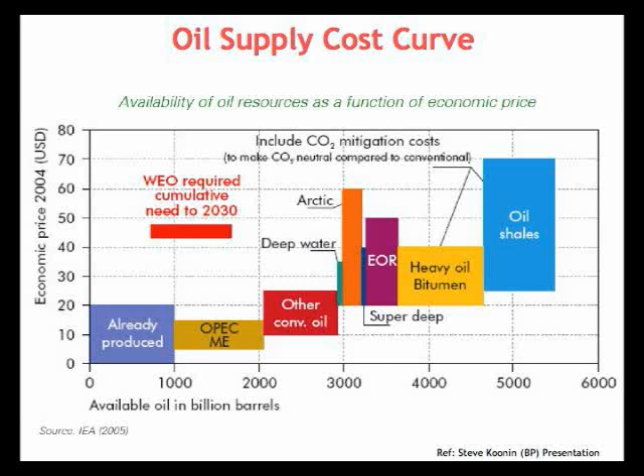All right, so here is what we've already produced in terms of billions of barrels of oil, so it's 1 trillion barrels that we already produced. This is what is available, but if your price is at $20 a barrel, well, you're sort of limited to this, but if your price goes up out here, then all of this is really available. So the availability of oil is a shifting target.

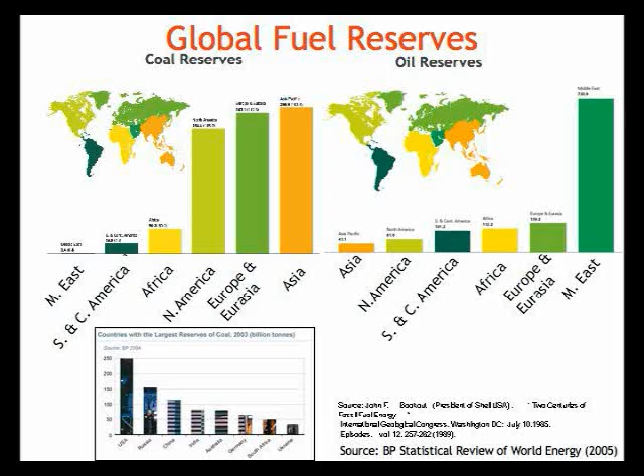But if you look at where the economies are growing, this is the oil reserves, in terms of just security of the oil reserves. You know where the oil is, the Middle East, and some in Eurasia. But this is coal. And this is Asia, Eurasia, Europe, North America. And here are the 4 biggest reserves of coal in the world, which is the United States, Russia, China, and India. And we know where the economies are growing.

So if push comes to shove, if something happens out here, political instability, or just turning off the spigot, we'll be turning to coal. And that, of course, has its own consequences. But any fossil fuel can essentially be turned into any other fossil fuel. The idea of turning coal to a liquid fuel has been around since World War II, the Fischer-Tropsch process.

So in terms of the availability of fossil fuel, we have at least 150 years of coal, at least in the United States, maybe 200 years. There's debate. And so as far as the 3 big economies of the future, United States, China, and India, coal is certainly there. So if you're thinking about the next 50 years, the availability of fossil fuel is certainly not the issue, because there's enough. The price is an issue, and that's a question of supply, demand, et cetera.

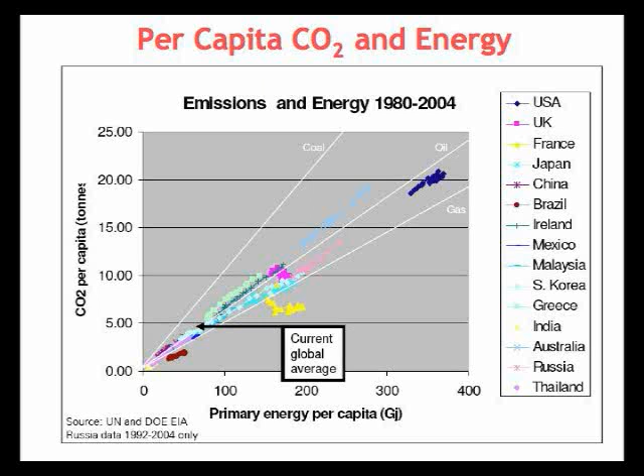But if you turn to coal, this is the CO2 per capita, and we all know that the carbon intensity of coal is almost double that of gasoline or liquid fuel and natural gas. So that has CO2 implications. But perhaps the best way to look at this is the following. I like this paper by Hoffert, and there are many authors on it, which came out about 10 years ago, where it looks at the projection for the next 100 years.

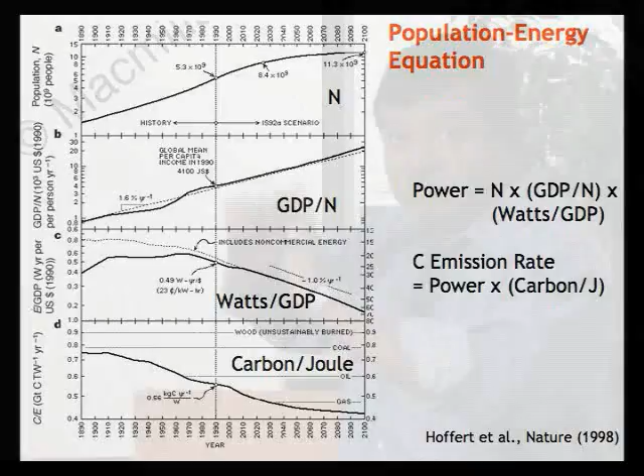So this is world population, and today we have about 6.5 billion people, and it's a nonlinear, log curve out here, and that is expected to saturate at around 11.5, 12 billion people. And I'll show you why that is saturating. Then this is GDP per capita, how much you produce per person, and that is increasing, which is a good sign. That means you're producing more. The amount of energy, this is global, not just any country.

So the amount of energy or power that you need to produce a GDP is going down, which is also a good sign. And finally, the carbon per joule, the carbon intensity, is going down, which is also a good sign. So all these three are good signs, except for one, that is population. And if you take the product of the first three, you'll get the total power. If you take the product of all four, you get the total carbon emission rate.

And this is what it looks like. So this is the power that the world needs. Forget about the colors out here. They have implications, but let's just look at the total. Today, it's about 15 terawatts of power that the whole world needs. And we are emitting at about 7 to 8 gigatons of carbon per year, and that is increasing linearly. This linear increase is very important.

Why is it increasing linearly? It's because the demand of energy is increasing, and the carbon-free or carbon-neutral cannot keep up. So that gap between what is required in terms of power and what can be supplied from carbon-free just doesn't match up. If they're growing at the same rate, you would have a constant carbon emission rate. But the gap is increasing, and this is essentially that gap.

So what happens to this carbon? Well, we emit CO2, and the biggest sink of CO2 that goes out in the atmosphere are the oceans. And so I won't do any climate modeling out here, but do a very simple limiting case. And a limiting case is probably the best way to do it, or at least the simplest way to do it. Let us assume, for the time being, that every molecule of CO2 that we emit can instantly come to an equilibrium with the ocean. That is, you can dissolve it in the ocean immediately.

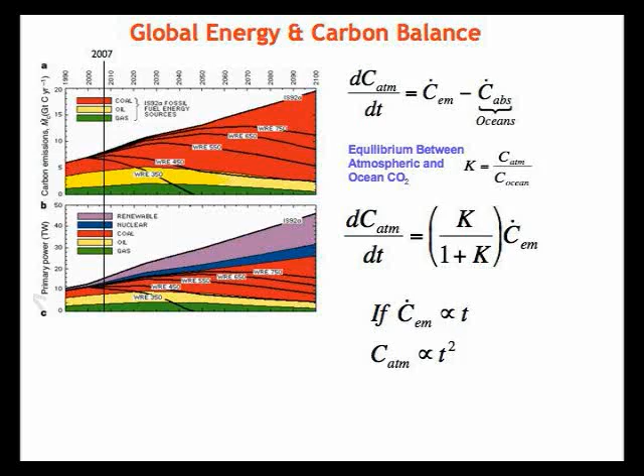That's obviously not true. It has a lifetime of about a few hundred years or so. But let us take the best case and see how bad it is, right? Let us say the concentration immediately comes to equilibrium. Forget about diffusion. Let's assume that. What will happen? Well, here is the mass balance. The rate of change of carbon in the atmosphere is equal to emission rate minus absorption rate. This is like bookkeeping in your bank account, right? Your income versus spending, and that's how much is there in the bank.

But let us say that it comes to an equilibrium. So there is an equilibrium constant. Henry's law gives you an equilibrium constant of the carbon in the atmosphere and the carbon in the ocean, and you could write it under equilibrium. This is the best case scenario. And then you can rewrite this equation in this form. And if that's the case, you have the emission rate and some constant, all right? And that's the rate of change of carbon in the atmosphere.

If this goes up linearly, this is 10 years ago. This is now a little nonlinear. But if this goes up linearly, you get a quadratic change in the carbon in the atmosphere. So essentially, we're just throwing it up there and it's accumulating. So this is what you get then. You get a quadratic, and if today we are at 380 parts per million, you can do a little curve fitting and you can project. That's the best case scenario. That means in 50 years, we double the pre-industrial level. So as we all know, there are many things that are irreversible at that point.

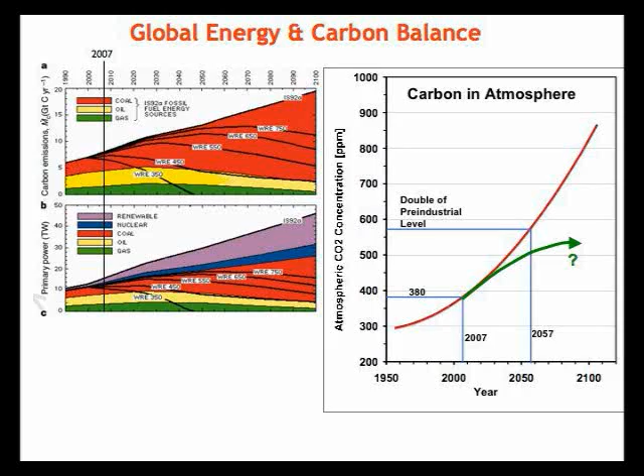And this is the best case, and if you have sort of positive feedback, the permafrost melts and it throws out methane, you might be at some t raised to n, where n is greater than 2. So that's the issue that we have. And the question is, how do we turn this around? That's the big question that our whole generation and the next few generations will have to face, right? So what do we do?

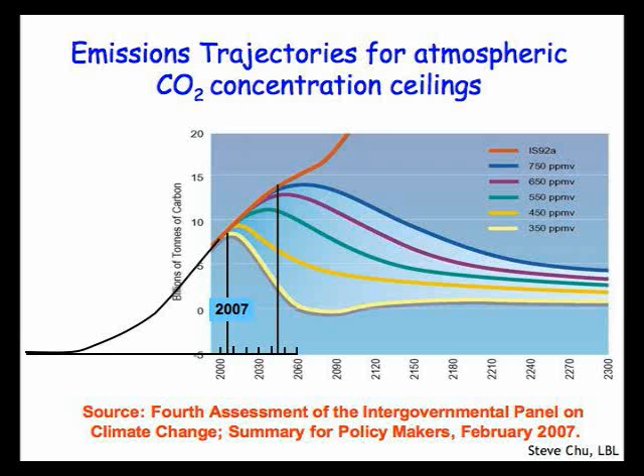Well, here is the IPCC prediction or model, and this is an optimistic one: if you were to stabilize at 550 parts per million in the atmosphere, and today we are at 380 parts per million, that is the emission profile that you want. That means that this is a constant. Eventually, you want to reach a constant emission rate, which means the gap between the demand and the supply has to remain constant, all right?

The carbon-free supply and the demand increase, they have to go parallel. Otherwise, you can never stabilize this. Otherwise, that'll increase. This is essentially that gap. So how do we get there? And that, of course, is, there's a lot of, today we are out here, there's some inertia in the whole economy. There's economic implications of this.

And how do we turn it? This technology policy is a combination of that. And it has to be addressed both from the supply side and the demand side. It's like a stick. You want to shorten the stick. Well, if you only shorten one end, the other end might grow. You've got to attack it from both ends and see how you can reduce the demand and increase the carbon-free or carbon-neutral part of it, because if the carbon part of it grows, then you lost this battle. So both attacks have to happen simultaneously.

Now there are questions, which one should we focus more? Should we do the demand side or the supply side? Well, and there are lots of economic models of it. I mean, really at the end of the day, we have to do both. Some of them will come on board in terms of actual implications at different timelines, but if you don't do both, we'll basically miss the boat because that stick might actually keep growing because we haven't addressed one side. All right? So this is a two-headed snake.

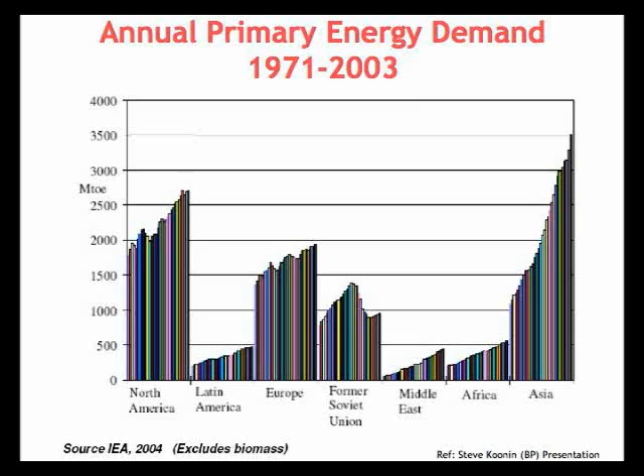So this is now, okay, so why does the demand increase? Well, this is the demand, annual primary energy demand, going in different parts of the world, North America, Latin America, Europe. This is, where are we? Out here. That's the demand out here. But look at this demand going up. Okay, this is Asia. So we have to keep this in mind that this is a global issue. You know, there's only one atmosphere.

It's a global issue. And so if this demand goes up, we should be looking at that very, very carefully to see. And this, I believe, is an opportunity for the United States, especially for the commercial side, to provide technology and policy help for this part of the world to see how this could be turned down without changing a lifestyle. And that's the important part. How do we do that?

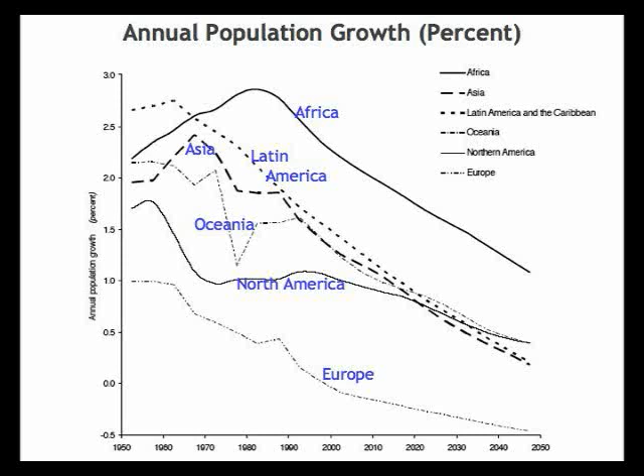So this is population, there's a lot of data on this from the United Nations, et cetera. This is population growth rate. You can see this is Asia. It's actually going down, and it's expected to go down. This is North America. Europe is actually negative. There's negative population growth. The only reason the population of Europe actually goes up is because of immigration. It's not because actually Europeans are reproducing more.

But Africa is over here, and that is also going down. But this is based on fertility rates and implications of lifespan, et cetera. All put together, that's the population growth that you have. But there are some factoids that I think are very important to understand. Or just, you know, it's stunning what the numbers are.

47% of the population growth from now till 2050, all right? So population will grow 47%. The increase in the next 50 years will be more than twice the population of China today, all right? The less developed countries will grow 58%, developed countries will grow 2%. And the less developed countries will account for 99% of the increment in the world population. And population, as we know, is related to the energy use as well.

And that depends on the income level and the GDP level. But certainly, there are two factors going on out here. And I'll come to the second factor. First is the population is going up in the developing countries. And second, the economies are improving in many cases. If the GDP, the income level goes up, the energy use goes up. So we have a double whammy that is happening in the developing countries.

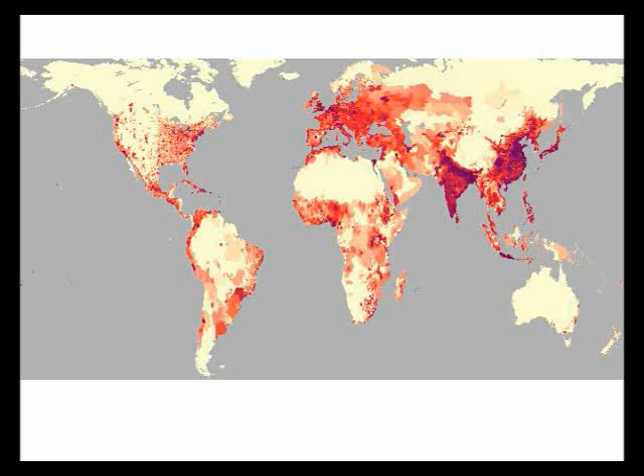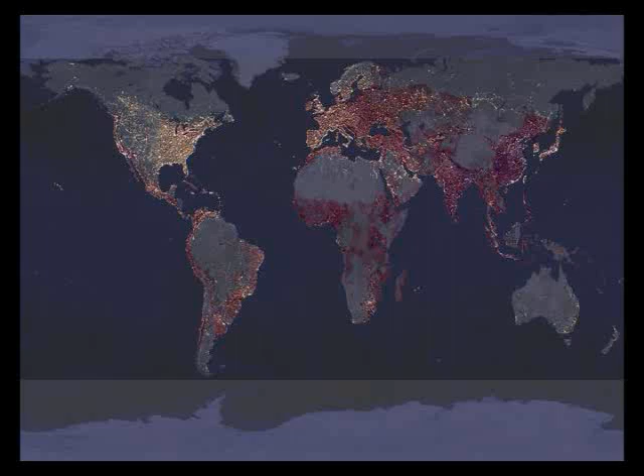So we have to address this issue while addressing this issue as well. And believe me, they are really eager to look at technology and policy help in how to move forward. So that's the real global issue that we're really facing. And as I said, you have to look at it from both the supply side and the demand side. You cannot ignore one, all right?

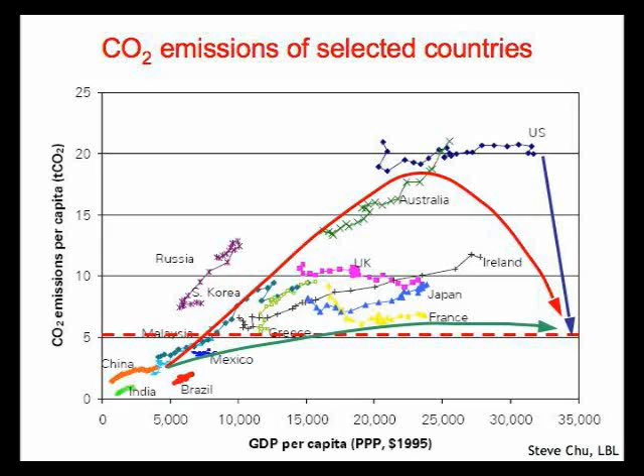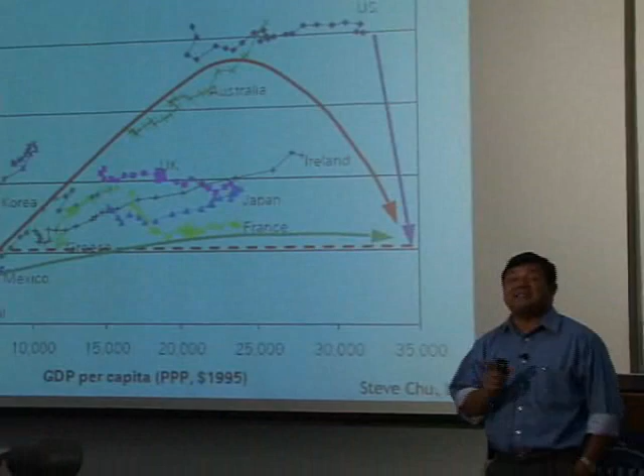And this is now the CO2 part of it. Some of the countries don't quite fall on the line because France is mostly nuclear, and they flatten out here. The question that we have to ask is, of course, how do we get the United States down to that level? But in addition to that, do we want China to go that way or to go that way? And this is a chart I stole from Steve, so full acknowledgement. But that's really, which path do they take? And can we help them go on the right path?

And I think this is one of the biggest opportunities for the green industry in the United States, to provide China and India with how to take the right path. Because we are in many ways ahead of the game in terms of technology and the policy side, especially in California. Okay, so as I said, we have to look at it from the supply and demand.

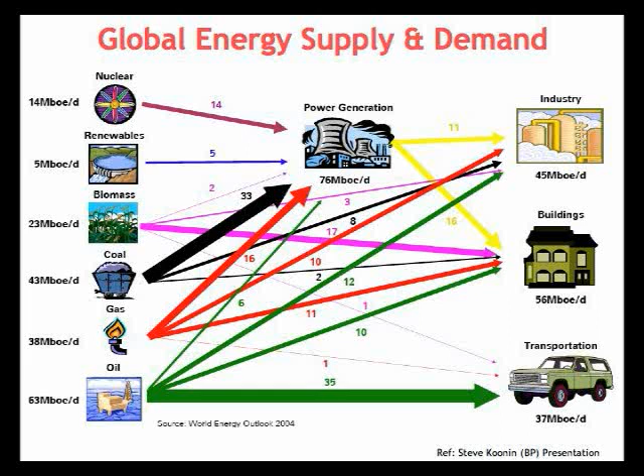This is the supply side, nuclear, renewables, and you can see the numbers as to where globally the primary energy is provided. This is millions of barrels of oil equivalent. Don't ask me to convert it to exajoules or whatever. But let's just take that as relative numbers, 63, 38, coal is 43, et cetera. And this is where it goes. Industry, buildings, and transportation, roughly about 1/3, 1/3, 1/3, all right?

So if you want to address this issue, clearly the carbon-free or carbon-neutral side of it has to increase. And if you look at the magnitudes, it's clear that there's a huge opportunity out here. This is where Helios, EBI, JBEI, CERC, and all come in, looking at this side of it, right? And now we have to look at this side as well. How do you reduce the demand out here? And this way, energy efficiency. And this lab, of course, our division, has a long history in looking at this side and the interaction between the supply and demand, which is the grid and the utilities, et cetera.

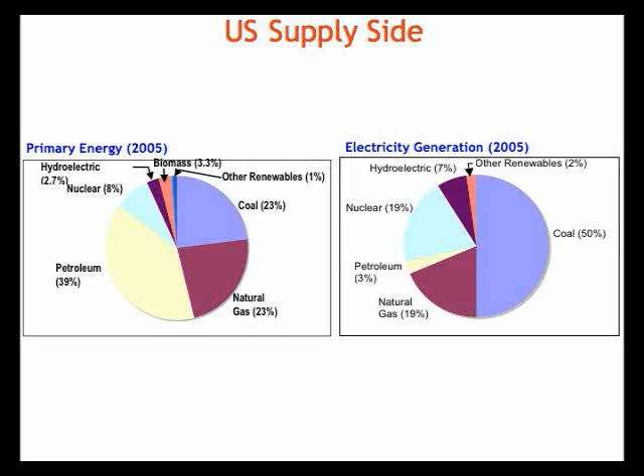This is the United States supply. We have the primary energy, petroleum is 39%. Most of it goes into transportation. Here is natural gas. Coal is 23% of primary energy. Renewables is 1% today. Biomass is 3.3%. Most of the renewables is hydroelectric. It's 2.7%. Nuclear is about 8% or so. If you look at electricity generation, so we're ignoring transportation now, 50% is still from coal. And natural gas is about 19%, nuclear is about 20% or so. So that's where we are today.

And so if you want to change the supply side, we have to look at this part and how do we increase the magnitude. There's technology, policies, all kinds of things have to happen. Wind and solar photovoltaic, solar thermal, all have to happen sort of simultaneously. And advanced biofuels, I would say, has to happen out here. The United States has changed its fuel, and it takes about 50 years or so to change the primary use of fuel. So it's not that this has never happened before, but for change of fuel from the supply side, it'll take about 30 to 40 or 50 years or so, right? So that's the time frame that we're looking at.

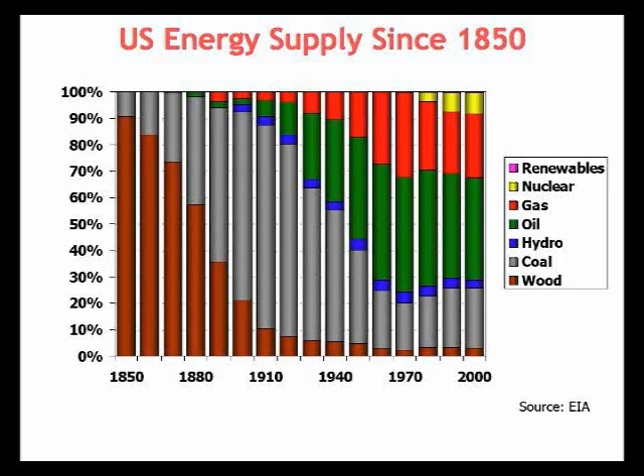But what I want to focus on is the demand side, because that's where our division, ETD, is focusing, and the interaction between the supply and demand. Because as I said, we have to address that side in almost an equal way as the supply side. And this is some history, and there's a long history of what happened in the 1970s. In many ways, we are reliving the 1970s. And I'll tell you at the end that there are a few cases where we can say that this is different. And I'll give an example.

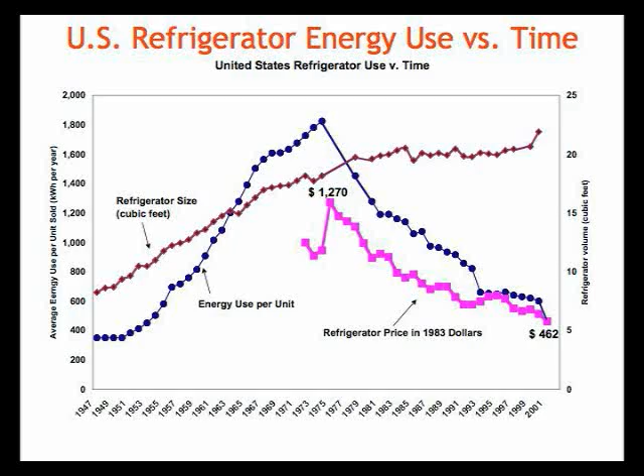But this is US refrigerator energy use. There's a demand side of 1974 or so, and then the energy use sort of came down. The size actually increased. The price came down also, so energy efficiency does not mean more price if the market actually moves. And this is a combination of policy, regulation, standards, as well as technology. So if you move the whole industry, then this can happen. Today we are at about 1/4 or 1/5 the energy use per unit refrigerator than what it used to be in the 1970s.

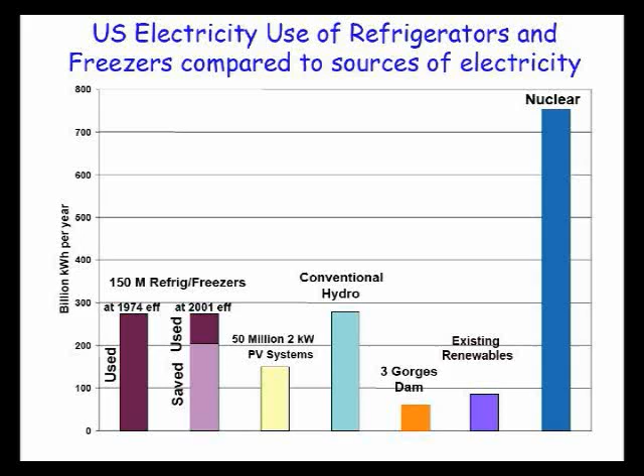So the implications of that, just to compare supply and demand, here is what the total energy use of refrigerators would have been if you used the 1974 standards. This is what it is today. So that's the amount of energy that you save. And just to give you a comparison, this is Three Gorges Dam. This is all of existing renewables in the United States. This is nuclear. This is conventional hydro. This is existing renewables without the conventional hydro. And this is 50 million 2-kilowatt PV systems. So the implications are huge.

So there's a lot to be gained in reducing demand by increasing energy efficiency. But energy efficiency alone is necessary, but not sufficient. I mean, we can make our home much more energy efficient, but if we buy a bigger home, you lost the battle.

So it has to be reduction of demand, total demand. So how do we do that? What do we do moving forward? This was sort of 1970s, a great story, and just one example of many other such examples.

Industry is a big use, and is 1/3 of the energy use. So which are the big energy hogs in the industry? Well, it is cement, steel, it is paper, glass, and all these things sort of go, at least the steel, glass, and cement go into buildings and transportation. So eventually, the big energy hogs feed into the buildings and transportation. So we have to address the buildings and transportation and look at them in an entirely different way.

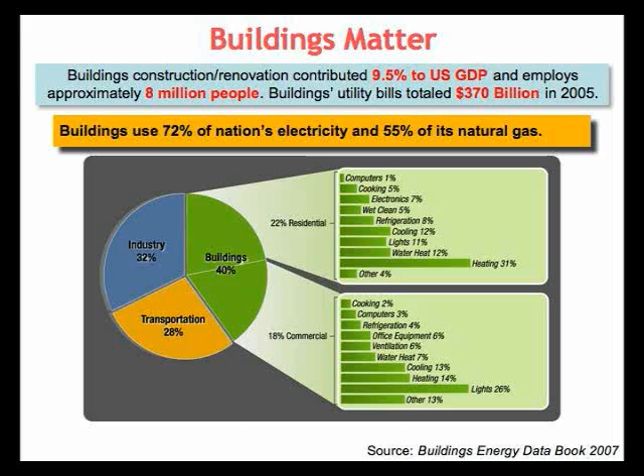So this is what our division is looking at right now, this spread out here, the residential side and the commercial side. Right now we are focusing on the commercial, but there's some residential work also. There's residential work going on campus, and so there's a partnership going on right now. This is where the energy goes into the building. In the commercial side, it's about 26% lighting, heating and cooling. Heating, refrigeration takes about 40% of the energy. And in this side, it's about 60% of the energy in just heating and cooling, right?

So what we're looking at is that if you look at this sector, can we change the way business is done, all right? Can we really impact the market and introduce some market transformation? Because that's what is needed to get there. Let me give you some numbers.

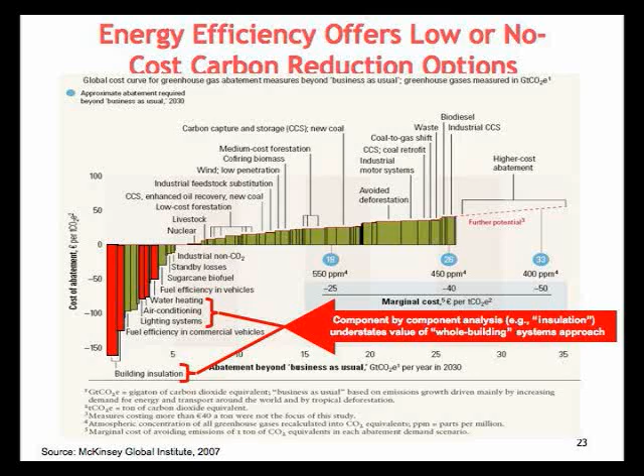So here is the famous McKinsey Global Institute study of the sort of cost of abatement, and you find the biggest chunk of that is building insulation out here, air conditioning, water heating, et cetera. And of course, they missed the big thing out there, is that when you look at that as a system, what else can you do? And they missed that, and now hopefully the next generation, which is I think coming out in the next few weeks, might have that. But that is the biggest opportunity, the lowest of the low-hanging fruits that you can get, is to look at buildings and reduce the energy consumption in buildings.

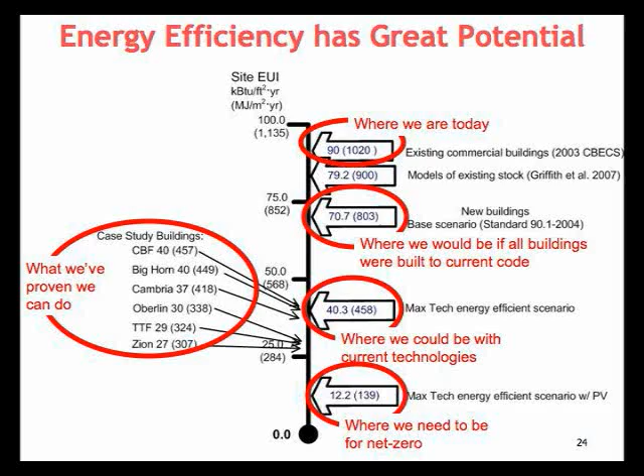Here is where we are today in terms of sort of megajoules per meter squared per year. That's the number that we have. Here's today existing commercial buildings. And where we would be if all the buildings were built to current code, right? That's where it would be. So it's about 20 to 30% lower. Where we could be with current technology is over here, and where we need to be for net zero energy, which is where we should be going.

That is, if you reduce the energy consumption in buildings by 80 to 90%, so that in the future, buildings consume 10 to 20% of today's consumption on a per square foot basis, then you can match up the rest of it by the renewables. And essentially, you have a carbon neutral building, or you can have an impedance match between supply and demand. That's where we really need to be. So how do we get there?

And it has to be a combination of technology, market, and policy. It cannot be one. If you only develop technology and the market never adopts that, it's never going to make a market transformation. So that's the combination. I'll just briefly touch upon that in the interest of time. On the technology, we just started launching this center called HiPerBRIC, High Performance Buildings Research and Implementation Center. It's a multiple national labs, industrial consortium, university partnership. This is where the gaps are and the opportunities are.

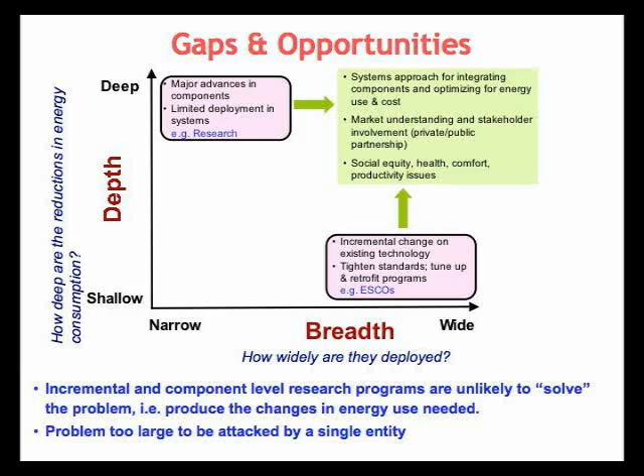If you look at how widely an energy-saving measure can be deployed, the things that can be widely deployed, sort of like tightening standards, tune-up, it's like a tune-up of your car. It can be widely deployed where the energy savings are about 10 or 15 or 20% on average. You can have deep energy cuts in zero net energy buildings, but it cannot be widely deployed because they're expensive.

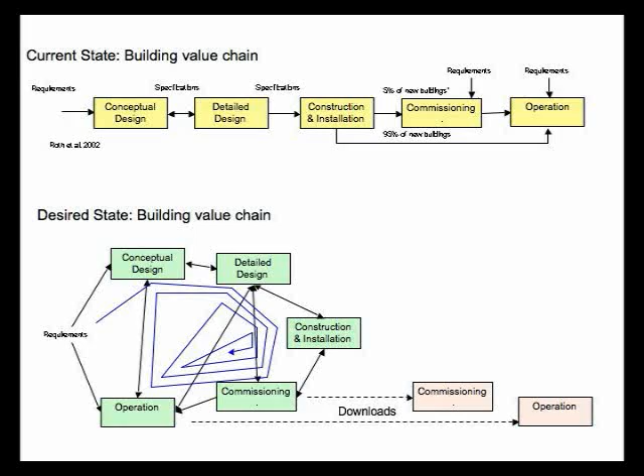So how do we get the cost low enough and widely deploy is over here, looking at integration and a whole building approach, because a building is a system. So what is that? The way buildings are designed today is very sequential. You have a conceptual design, a detailed design, then construction, installation, some of it may have commissioning, then operation, and it goes from the mechanical contractor, the building contractor, the electrical contractor, and it goes into silos, and there's hardly any

discussion between them. What you really want is a feedback loop in the building construction itself: conceptual design, detailed design, construction, installation, commissioning, operation, all talking to each other and iterating. For that, you need technology. It's like the way Boeing 777s are designed today, it's all on the computer. If you change the electrical system, it changes everything in the whole plane, and you can visualize the whole impact of one change in the whole system.

So if your contractor decides to put less insulation in your building, everyone else gets to know about that so that you can then choose the right HVAC system. That is not happening today. And that requires some element of technology, of course policy, but some element of technology.

Next, you have to look at the building as a whole. You have windows and lighting, HVAC, natural ventilation, building materials where perhaps you could store energy in the future, on-site power, which can release heat that could be used for heating the building, and thermal electrical storage, all talking to each other. Because in a real building, they all talk to each other.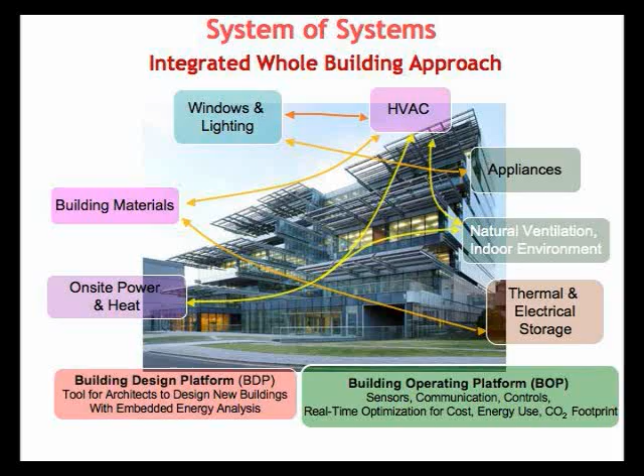But the fragmentation of the industry is such that you have the HVAC companies, like Carrier, et cetera, you have the lighting companies, and they don't talk to each other. They build their own products, someone puts them together, and they don't know how they actually work. It's like driving a car with the best engine in the market, 40% efficiency, and great brakes, but you're driving with your brakes on. The whole system's efficiency goes down because they're not integrated. That is where we are today in buildings.

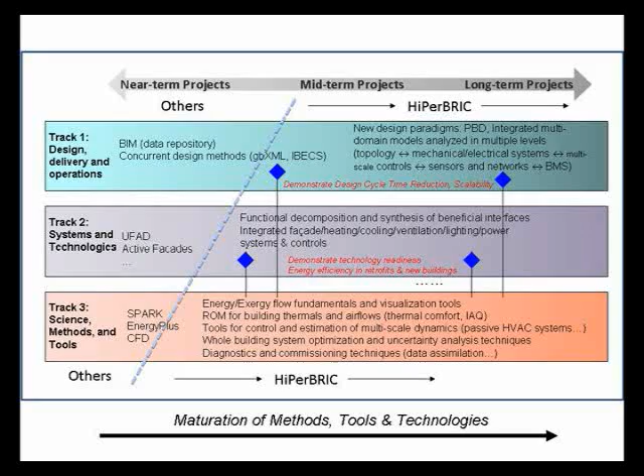I won't go into the details. We're looking at how to change the way buildings are designed and delivered. That needs system-level models, simulations and tools. And below that has to be basic science of thermodynamics, fluid flow and heat transfer, which feeds into that. Because if you change things here, that has to be reflected in the basic science of how buildings interact, the dynamics, and the time scales and length scales of buildings are very large. So that has to be a three-pronged effort, an entirely different way of designing

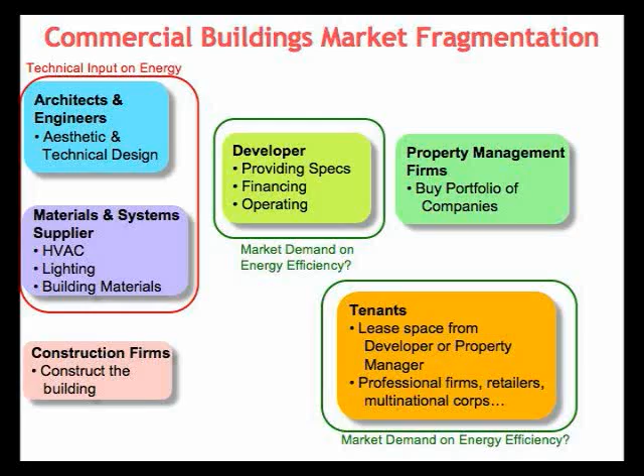and operating buildings. That's the technology side, but as I said, this is not a technology game only. This has to deal with policies because the market has to be transformed. Today, you have architects and engineers looking at the aesthetic and technical design, materials and system suppliers, HVAC, lighting, construction firms, a developer, a property manager, and tenants. Any technical input on energy is given over here, but the use of energy is done over here. So you have a mismatch. It is a classic principal agent problem.

The installation of the HVAC system is decided by the developer, but the use of that is by the tenant. So the tenant really has no control over this. And this person out here may not have any control of how it is used. So if you introduce energy efficiency, who's going to win? And if it is inefficient, they're pointing fingers. They say, you didn't put the insulation out there. You didn't connect it properly. So there has to be an entirely different way of handling the market side, and the policy has to change.

Today, the buildings are designed according to code. That's a design performance. It is not based on measured performance. So the buildings, the LEED, gold, platinum, whatever, they're not actually measured. So you don't know how they're actually performing. So the first step that we have to do is to make energy consumption visible to everyone. It's like the Prius meter that shows how much energy, then you back off and you accelerate when you see that. Well, that needs to happen. That's sort of the first step, baby step towards changing things.

The performance standards. There has to be a measurement, just like you had a refrigerator standard, there has to be a national building standard, which does not really exist in any effective way. And you can correct it for weather and climate and all that. And there has to be a price signal. If you're below the standard, you have cost of carbon. If you're above the standard, financial incentive. And then you have to have a shared benefit. If you do well, then you share the benefit. And all these policy changes have to happen. So it's a long task for all of us to do.

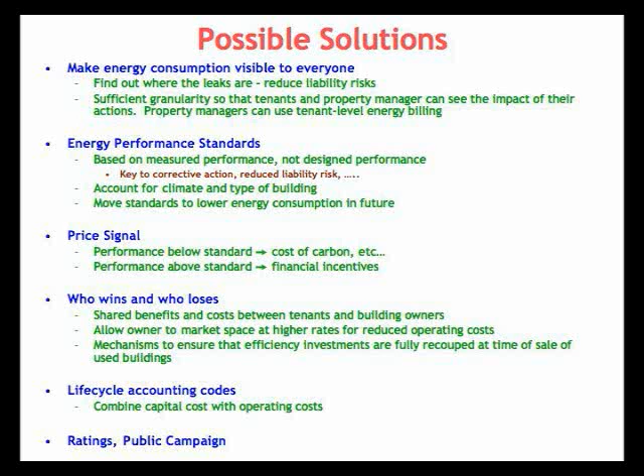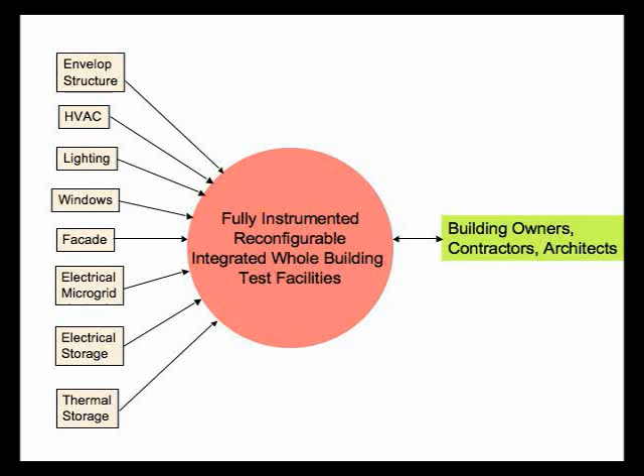And then, of course, what we are proposing to DOE, I'm just putting it out here, is a fully instrumented, reconfigurable, integrated whole building test facility where all these envelope structure, HVAC, lighting, windows, facade, all these things go into one. And you look at it as a system, because if you don't put all of these together and demonstrate that you can save energy, the building owners and contractors will never believe it. They say, show me. Well, here it is.

And that's what a national lab ought to be doing, creating the home for a facility where people come together and show that this can actually be done. And this is what we are proposing, with a little bit of objection now from DOE, but we'll get there. But that's what we really need.

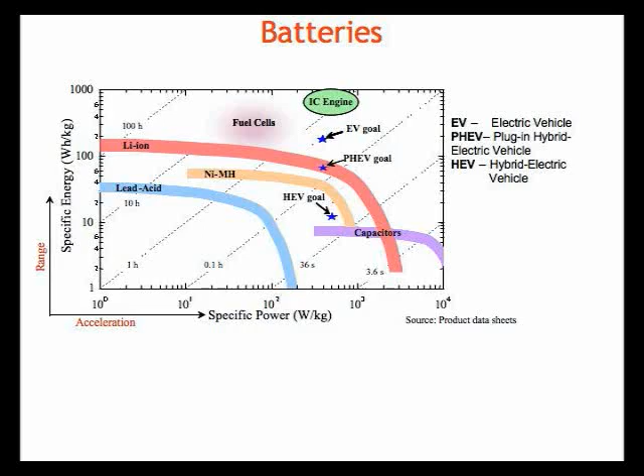Let me just switch to storage. We have a very strong batteries program out here. And batteries, this is primarily from the transportation side. And this is where we are today. This is specific energy or energy density in terms of range, and acceleration is specific power. And the lithium-ion batteries, the power density is certainly there. The energy density has to increase. It's sort of double or triple the value to get to where you can get plug-in hybrid vehicles, electric vehicles.

And that's great. There's now a strong collaboration between the ETD and Material Science Division to look at batteries in a very fundamental way, which is one of the EFRC proposals. That's great. In transportation, you worry about the density. But if you were to use batteries in the residential side, you don't have to worry about the density, because what's the weight? I mean, it doesn't matter. You put it in your garage.

And the power requirement for homes is much less than cars. The car's about 50 kilowatts or so. My home is on average about 1 kilowatt, right? Hopefully it'll be less in the future. So what you need is capacity. People are talking about plug-in hybrids. You drive your car, plug into a line, and then you store grid-level storage. Well, homes are already plugged in. And that's where I think a real opportunity exists, not just in transportation, but in buildings as well.

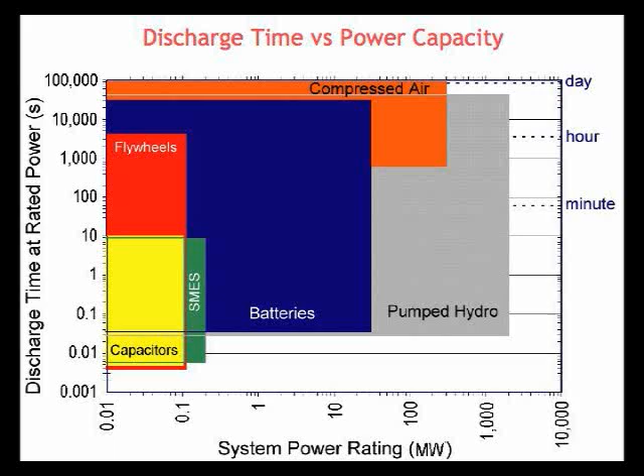But you can do other ways of storing energy as well. And what is the implication? What's the science and engineering of that? We should certainly keep that in mind.

Let me now switch in the few minutes that are left to something that I do on my weekends and nights that my wife doesn't know.

But we look at energy conversion. This is the energy conversion, and this is where really Helios is. Light to fuel through this way or this way, right? That's the light to fuel. In my group, we focus on the bottom. And that is important as well, because 90% of the world's power is generated that way today. And any increase in efficiency is useful. So this is on the supply side I'm talking about.

So why don't people take fuel and directly go to electricity using fuel cells at the terawatt level? Why not? This is direct. Here you burn, and from here to there you pay the penalty of Carnot limits. And you lose about 65 to 70% of your fuel out there, and still you go that route. Why is that? I mean, you're less efficient.

The reason is that it is cost effective because this is volumetric. It's volumetric in the sense you've got a combustion chamber and you've got a turbine. Your power goes as the cube of the characteristic length, whereas the material cost goes roughly as the square because it's surface. So the power to dollar ratio increases with size.

So that's why this route of using a volumetric approach to generating energy is the route to do it. Because if you were to use fuel cells, the amount of power is limited by your surface area, which is length squared, and the dollar is roughly about that, so you don't gain at large power levels.

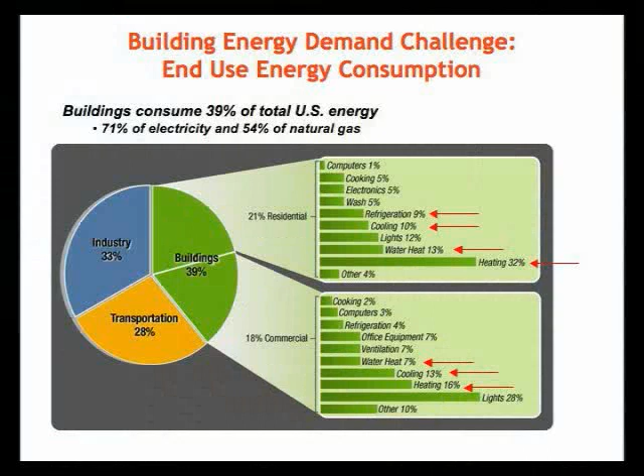So that is why people have traditionally, since steam engines, been going through this route. And that is unlikely to change, at least in the next 50 years. Maybe something else will come up, but unlikely. But there's a lot of gains to be made out here. And so that's on the supply side. On the demand side, heating and cooling, this is 60% and it's about 30% or so.

So what we are looking at is, can we change the ball game? What I'm going to present is potentially game-changing, not yet, but potentially in the future if we get our science and our engineering right. What we have been looking at, and this has been going on across the world for the last 50 years or so, is solid-state engines and refrigerators.

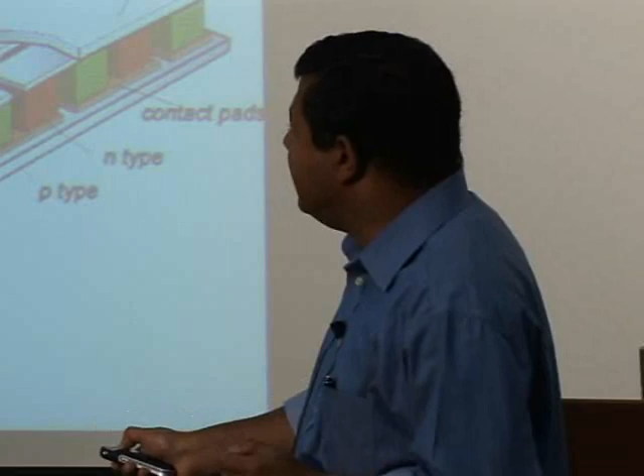You take a semiconductor, put them electrically in series, and if you put heat in, you get power out here. Or if you bias it and send a current, you can grab heat from the cold side and dump heat on the hot side, so it's a heat pump or refrigerator, depending on which side you're interested in. These are solid-state devices. The same device can work as both engine and refrigerator. You can't do that with vapor compression or the steam engine Rankine cycle.

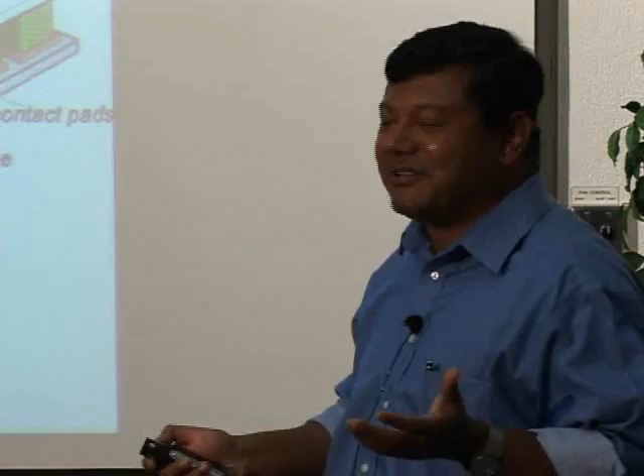So how come people don't use it? Because the material of choice is an exotic material called bismuth telluride, and it's low efficiency and expensive. On all axes, it's at the wrong end. So why isn't it efficient? In any heat engine, you compare how close you are to Carnot. You can't beat Carnot, at least not as of today. So the fraction of Carnot is what is important. Most engines and refrigerators today are about 30 or 40, maybe 50% of Carnot.

And the figure of merit that controls the efficiency, I'm not sure why this exclamation mark, is a number called ZT. It's a non-dimensional grouping. This is the Seebeck coefficient, or the thermopower of the material, which is how thermocouples work. Here's the electrical conductivity, the absolute temperature, and the denominator is thermal conductivity. You want to increase ZT, because the fraction of Carnot goes up monotonically. Today we are out here. We want to get to ZT of 3 or more so that you are about 30% of Carnot.

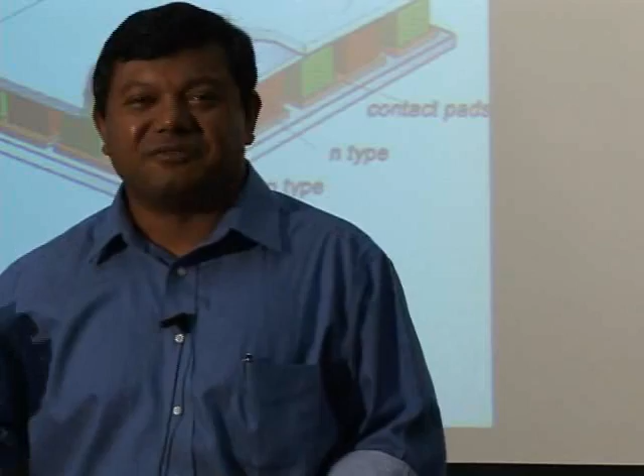So it seems like a trivial problem because each of these properties in a semiconductor can be changed by orders of magnitude. You can take a semiconductor and dope it, right? Silicon doping is very, very common. And you can change the electrical conductivity by 5 orders of magnitude. It's interesting that regardless of whether you can change individual properties by orders of magnitude, people have not been able to change ZT by even 20 or 30%.

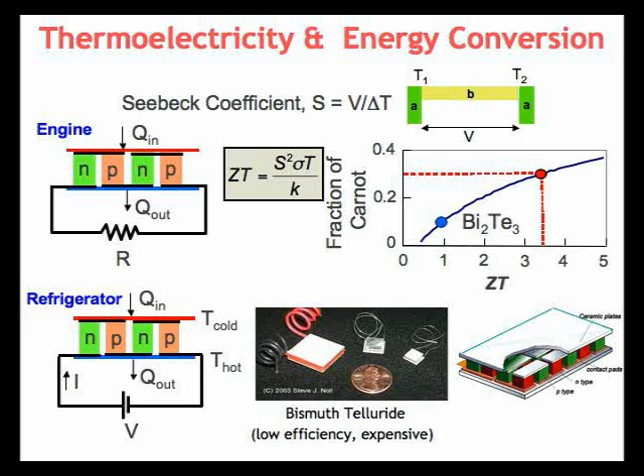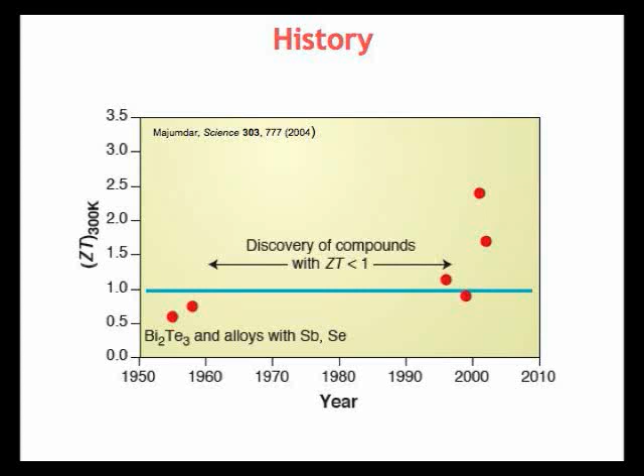And so that's the sort of historic, let me just get to this. This is the history of ZT out here. Bismuth telluride was discovered in 1955, where the ZT was 0.5. Remember, we were shooting for 3, and this was like 0.8 or so, and people thought, whoa, by the 1980s and 90s, we'll have all solid-state refrigerators and engines. Of course, that did not happen.

Nothing grew out here until the last few years. And that's why I said this is probably the most exciting time of my scientific life, because this is happening. It's almost like the discovery of superconductivity. Suddenly, things are going up, right? So why is that so difficult?

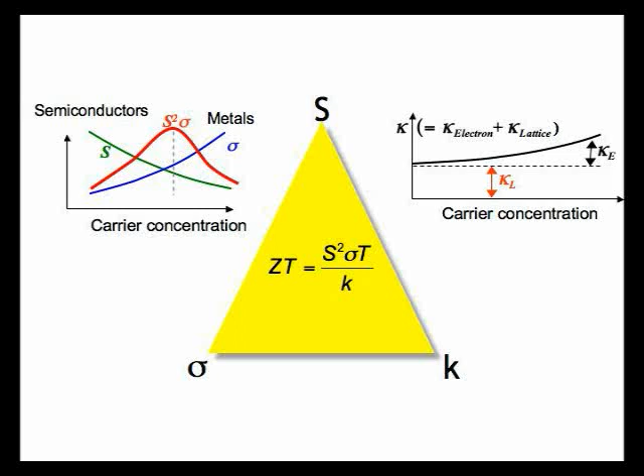Well, it turns out that if you change the doping level in a semiconductor, the S goes down, sigma goes up, and somewhere you get a maximum. It's almost a degenerate semiconductor. And the thermal conductivity, if you increase the doping level, there's some dependence on the carrier concentration, and this is the lattice. Again, I won't go into the details. So you cannot independently change these properties, because if you change one, the other changes.

It's like this little bubble in the carpet. You press it out here, it moves somewhere else. That's the problem. And I call this the Bermuda Triangle of thermoelectrics, because we are all in it, we can't get out. It's so engaging, it draws us in, we can't get out now.

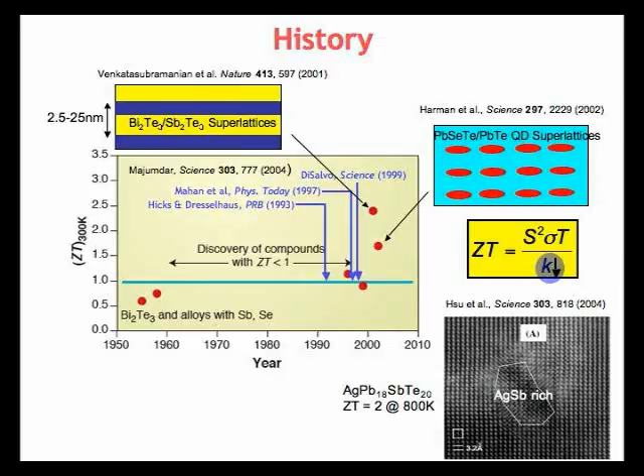But what has happened in the last few years is that people, and this is my mentor at MIT, Dresselhaus, who gave me the advice, predicted that if you use nanostructures, you can get to higher ZT. And it did happen, but for the wrong reasons. Not for the quantum confinement effects that she was predicting, but for thermal effects that I'll get to in a brief moment. So it's all about thermal conductivity. How do you reduce thermal conductivity in a material without changing electrical conductivity?

So very quickly, the thermal conductivity in a solid is like black body radiation. The physics is almost the same. So you've got black body radiation from the sun coming through, you get the solar flux, and you get sunburn. How do you reduce the solar flux is what we're talking about. And a black body Planck distribution is there, right? And what people have been doing is to make alloys. So you put a little impurity in there, and you can reduce the thermal conductivity significantly. And they call it the alloy limit.

And this is where nano really comes in. You can beat limits that people thought were limits. They're not. There's nothing kosher about those things, right? This is not the first and second law of thermodynamics. These are artificial limits. So this is what people did.

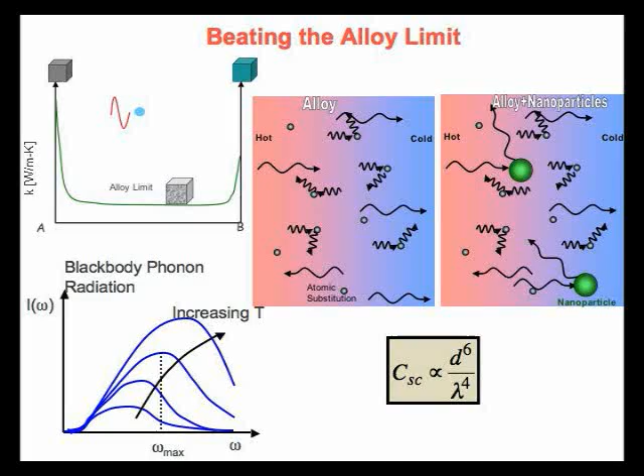But we know from our experience, at least in the atmosphere, when you have black body radiation come in, the blue light gets scattered more than the red light. That's why the sky is blue. It's called Rayleigh scattering. The small particles, which are much smaller than the wavelength, scatter according to, whoops, everything has got spoiled out here, the 4th power of the wavelength. So the smaller wavelengths get scattered much more, by the 4th power, than the larger wavelengths. So think of this as the blue sky. The little alloy atoms scatter these vibrations in the solid.

So what we did was we just made a cloud. You put cloud cover and you reduce the flux. So if you put particles of the right size, which is at the peak of the Planck spectrum, then you scatter pretty much everything. And so you can beat the alloy limit. And so we have shown that you can actually beat, oh man.

I think the time is up. Someone is controlling this. All right, I'll try my best again.

It was going downhill after a while. He just quit on me. If you have questions now.

This is my science part of it, my policy or whatever. The global energy part is over. But I think the last thing that I'll talk about, I'm really excited about, because, as I said, we're trying to look at things which are potentially game-changing. And the last one is on solar. We're just starting to work on it. We have a patent on it.

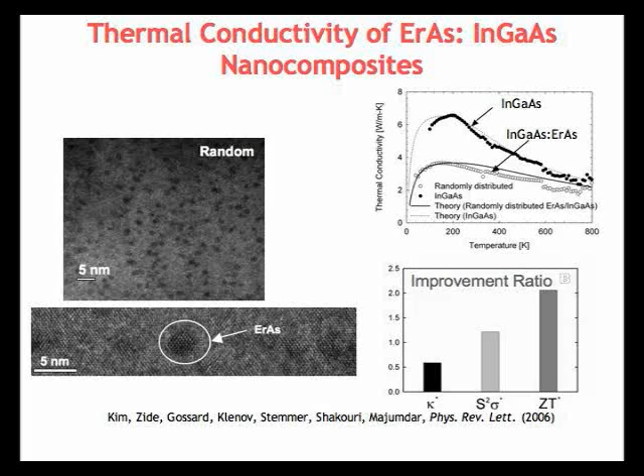And we can double ZT by design, which was one of the first works which could double the ZT by designing the materials in the right way. And that is leading to higher efficiency right now. This just came out of our lab, a collaboration with Peidong Yang's group, using silicon nanowires. Again, we have shown ZT of 1, the same as bismuth telluride, in silicon, the most abundant semiconductor.

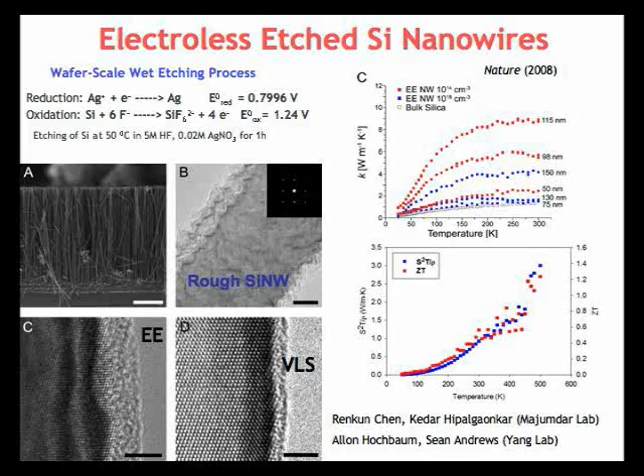And the science is still unknown, because we are finding that as far as the thermal conductivity is concerned, it is behaving like an amorphous material. But it is crystalline. And there is some hypothesis that these sound waves that carry heat are being localized in some way, which no one has ever shown before.

This goes back to, I don't know if you've heard, Anderson localization. In 1958, Phil Anderson showed that electrons can localize if you have disorder, and you can turn a conductor to an insulator because the waves interfere destructively locally. And that is what may be happening in the sound waves which carry heat. So there's some very interesting science, which if we can show, we can again beat certain limits. That is potentially game-changing, not yet.

So that is on the thermoelectric side. And the silicon thing has got a lot of interest from the VCs. They're knocking on our door because the silicon industry is right here. It's a hold off because there's a lot of work to be done. But I think this is very interesting. I'm really excited about this.

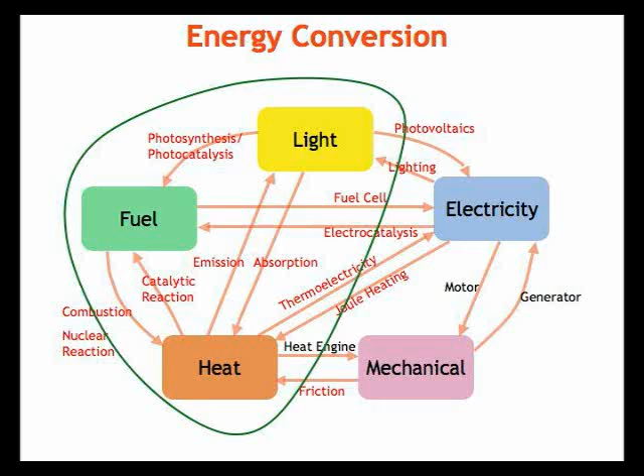Let me just do the last few slides on sunlight and solar thermal. There's a lot of work going on in the lab on solar photovoltaics and solar photoelectrochemical. Elaine has been leading the effort in Helios and others. Let me talk about solar thermal because, as of today, unless new technology or new science comes in, the price of solar photovoltaics is much more than solar thermal. So can we change the way solar thermal is done? Here is a potential way, probably the first new thing that I've seen in the solar thermal area.

What is it? Well, this is how solar thermal is done today. You have a collector where you have mirrors that focus onto a receiver, a heliostat, and you want to concentrate sunlight because you want to use the heat and go to as high a temperature as possible. It's not just the energy, it is the high temperature, because the efficiency depends on how high a temperature you can reach. It's Carnot efficiency, right?

So higher the better. That's why you concentrate all the sunlight and you heat something, and it's very easy to heat. And then you run it through a Rankine cycle, like a steam turbine or a gas turbine, and you can produce power. And sometimes you want to store it, and you have thermal storage. This is the way it is done today.

You cannot separate out this part from this because heat cannot be transmitted from Nevada to Los Angeles. You're going to lose it in between, right? And you have to collect and concentrate, which makes it costly. That's where the cost comes in, all this collection and receiving. You've got to track all the mirrors, et cetera. This is fundamental. So if you look fundamentally at the science, why is it this way and not any other way?

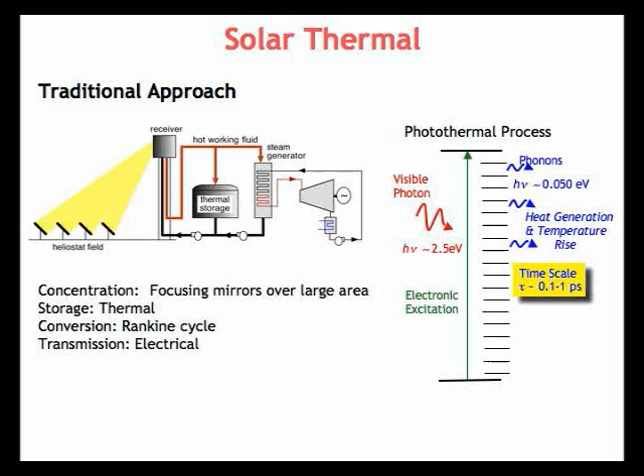up. And each phonon is about 50 millielectron volts, so you get so many phonons. But the important thing is the time scale. The emission rate is typically around a picosecond or so, anywhere from 1 to 10 picoseconds, or 0.1 to 1 picosecond. So as far as this system is concerned, this is instantaneous, right? It takes maybe 50 picoseconds, big deal. It's instantaneous. What if you change the ball game, and can you then change the system?

What if, instead of suddenly going down, you put a barrier? Just like throwing a ball over a roof, and there's a little thing out there, a barrier which prevents it from coming down immediately. And if this barrier is sufficiently high, you can store it for years. And that is exactly what can be done. This is a collaboration between Peter Vollhardt in chemistry and chemical sciences, Rachel Segalman, and myself.

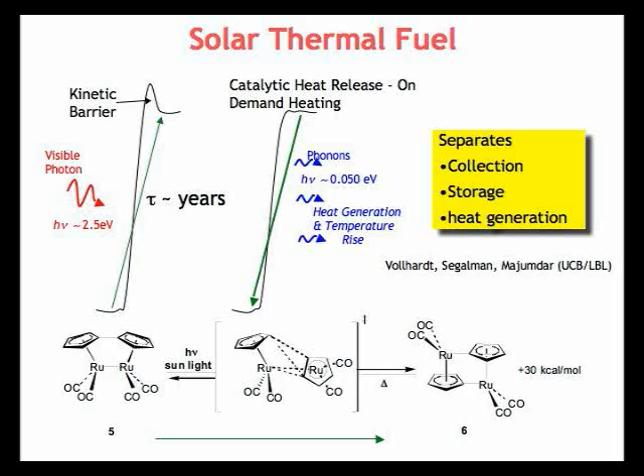So if you could do that, then you could reduce the barrier by a catalyst and release the energy as heat whenever you want, on demand. Okay? So that is what we are looking at right now. And the way to do that is an organometallic molecule: you have this aromatic ring out here, either 5 or 6, doesn't matter, and you have ruthenium with CO out here. You can hang pretty much anything out here. Ruthenium is expensive, of course, but he's now looking at iron.

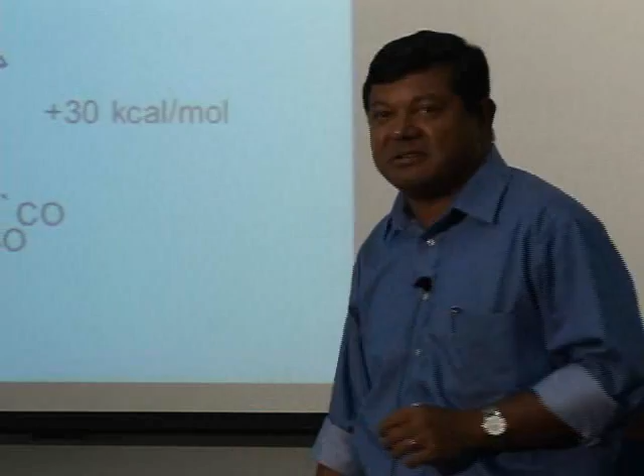But the interesting thing about this molecule is that when you shine sunlight on it, it absorbs visible sunlight and goes through a molecular transformation, a configuration change. It's essentially a twist of the spring, and it stays there, at a higher energy level where it is completely twisted, about 30 kilocalories, or about 1.5 eV, the same units as before. Now, if you expose this to a catalyst, and the catalyst is charcoal, it goes back and dissipates the heat.

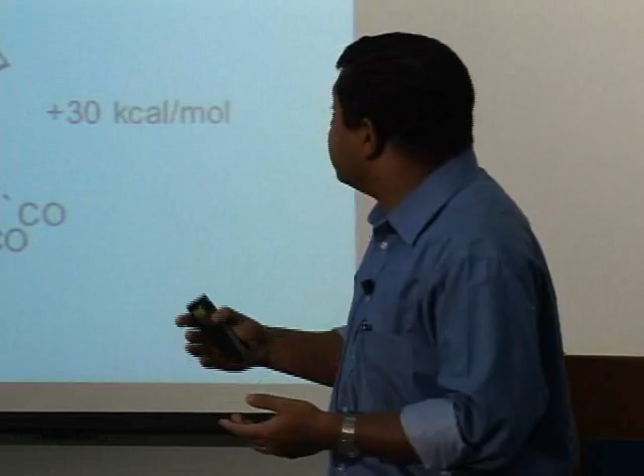So now, if you look at the system diagram that I showed out here, you don't have to put all these mirrors. You can put it in a pool, collect it, transport it from Nevada to Los Angeles if you want, and in the absence of sunlight, run it through a catalytic reactor and get heat out. So it separates collection, storage, and heat generation, and you can store it for years. That is what we are looking at right now; we're just launching on this. And if this really works out, this potentially could be game-changing.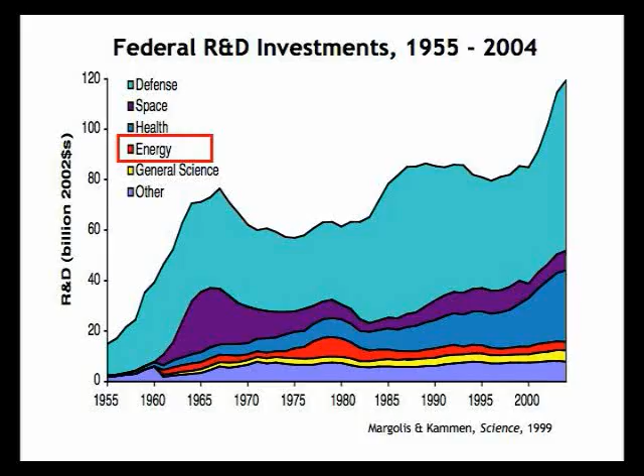But here's energy funding in the 1970s, right? Energy funding has remained this. This is defense. This is space. This is health increase, which is good; we're not saying it's bad. But this has to have this big climb now. Hopefully that will happen. Let me end on this hopefully optimistic note.